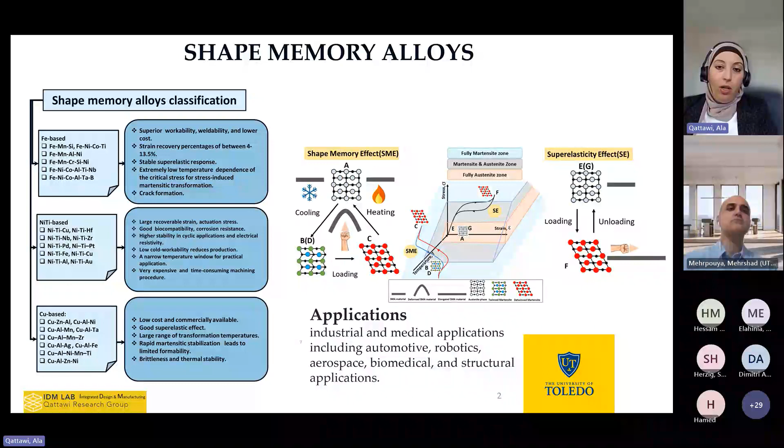So the particular interest in our research is iron, manganese, aluminum, nickel alloy within the iron shape memory systems. Historically, using traditional manufacturing processes, the iron shape memory has good strain recovery, with a varying strain recovery percentage that can be up to 13.5%. We also have lower cost and good workability because of the presence of iron in the alloy system. And with all the research done in traditional manufacturing of this alloy, we also know it showed more ductility and small temperature dependency of the critical stress.

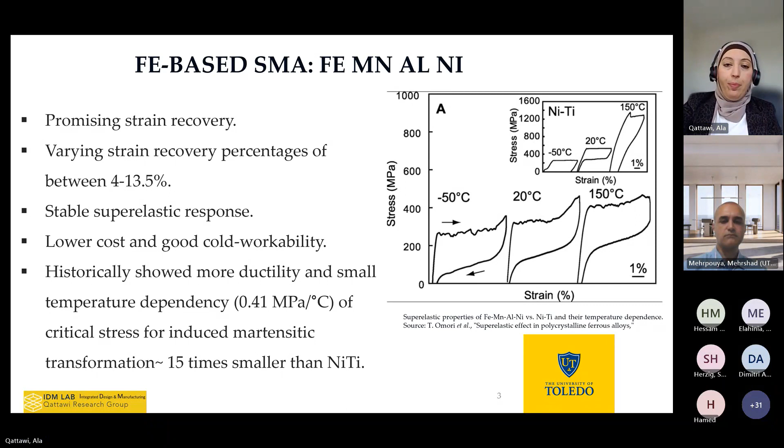Another study has been done on the iron manganese nickel aluminum alloy system for high temperature applications where there's a high variation of temperatures, like aerospace or space exploration. There is a window where this alloy system can potentially perform with a transformation temperature strain that's actually very good and desirable. So there is definitely a window and a potential for exploring these alloy systems.

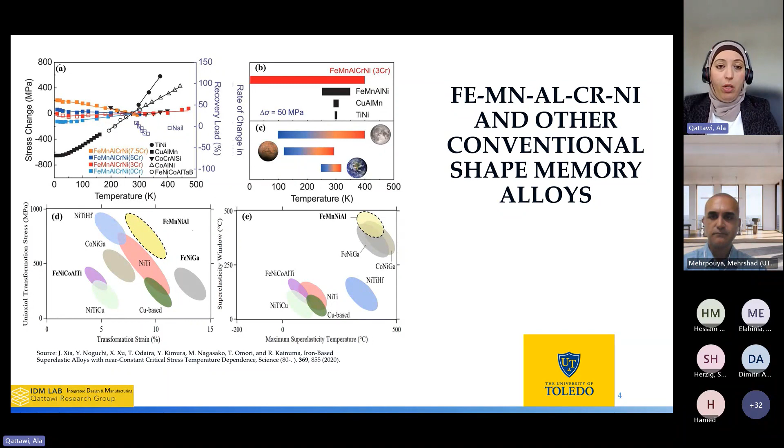Now, one question that can be posed is: if we've already established a process for nickel titanium through casting and induction vacuum melting, why not just explore the same processes for the iron shape memory alloy? What we know from the characteristics of this alloy system is that it's very susceptible to changes in processing parameters, even in traditional manufacturing or potentially in additive manufacturing. The cooling rate, for example, and the thermal changes across the process when we manufacture this part, can change the grain structure.

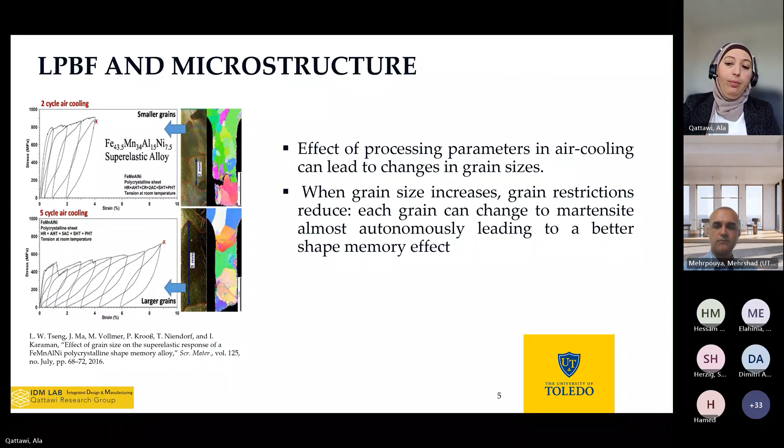This can significantly affect the performance and the super elasticity we can get from this alloy system. So potentially, this alloy system has the potential to show better strain recovery and less dependency of critical stress on temperature. If we understand the process parameters carefully, we can design this alloy system and structure to get the needed properties. And this way of thinking is not new to the additive manufacturing field.

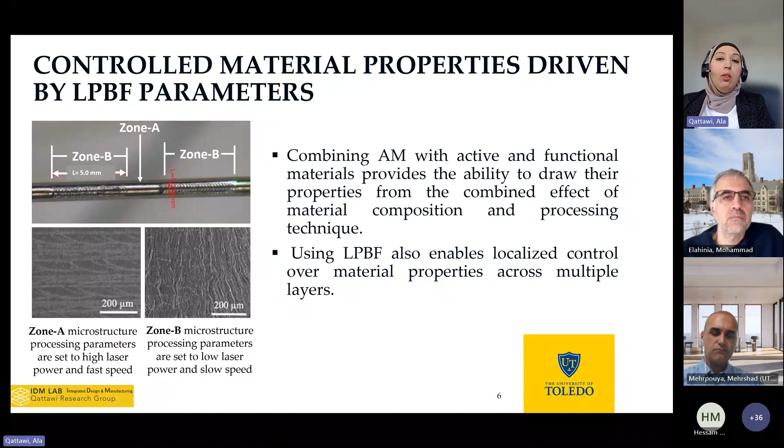Additive manufacturing started with understanding how to manufacture a part, what the material properties would be, and the correlation between structure, material, and eventually the component. Now we're in a phase where we've mastered the initial processing parameters, and we want to do functionally graded materials. This can involve different metals or alloying systems, or even variation within the structure itself. If we can localize the mechanical properties via microstructure in any alloy system according to where the material will function, we can technically control the whole design of the material, from the microstructure up to the component.

So this idea is not new to additive manufacturing, but it becomes critically important when we talk about shape memory alloys and structures that need to change, fold, unfold, or behave in a certain way under service conditions. That gives us a fourth dimension, technically, that we can apply in addition to the third dimension, which is structure, in order to design the full component from the micro scale up to the component scale.

For example, if we change the processing parameters on a laser powder bed fusion machine, that will yield a totally different microstructure within the same powder composition, same component composition—everything the same, with only the processing parameters changed. Basically, this is how much energy we're pulsing on the powder in order to melt it and create the part. So eventually we'll get different mechanical properties if we control these process parameters.

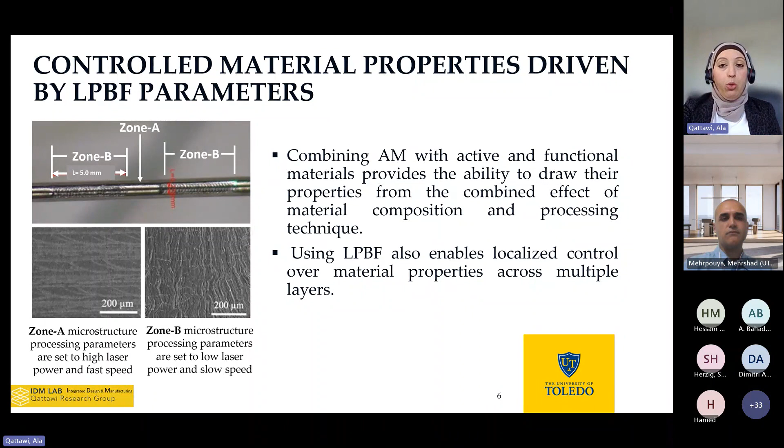So our analysis started with a customized powder. If you're in the additive manufacturing world, you know that powder is the most critical component of getting into additive manufacturing. Other than the well-known alloying systems, there's not much production of customized powder, and it's a process in itself to control the powder shape, particle shape, composition, and so on. So the first step was to customize this powder and have a collaborator who could actually produce it with the required composition and variations of that composition.

I want to add that this composition we used isn't something we just came up with. It's historically and scientifically proven to have a shape memory effect or super elasticity based on traditional manufacturing processes. So we started with what we know about this alloying system, which has been proven to have a shape memory effect.

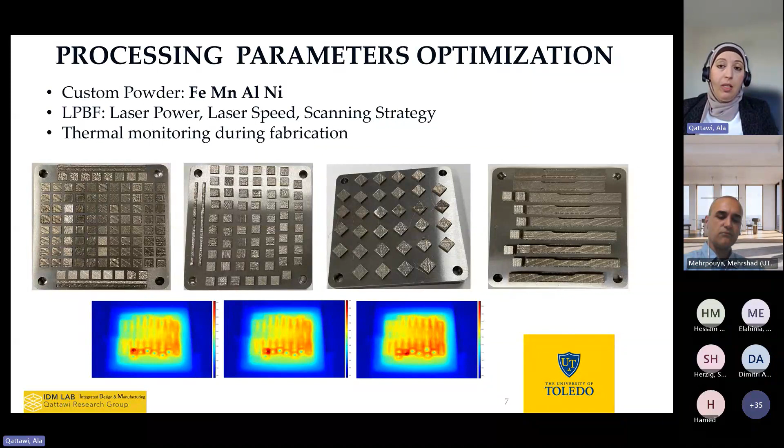The other thing for thermal history effect is with all this collective data we have on the machine, or generally in laser powder bed fusion, scientists are trying to understand two things. The first is if we can predict what the defects will be in any material while we're printing, so the machine can stop, correct its path based on the images it's collecting, and improve the quality of the material we produce.

The second aspect is to understand if we're able to predict the mechanical properties out of the thermal imaging. So if we collect a certain amount of gigabytes from the machine while printing, and we already know the mechanical properties of the tested coupons, can we correlate that? In other words, we also control the thermal properties by controlling the quality, and then by understanding the prediction of the mechanical properties we're going to produce.

So eventually there's no need for testing with machine learning if we can. The collective of this data will be correlated to the mechanical properties we get, and then eventually the shape memory properties in the material.

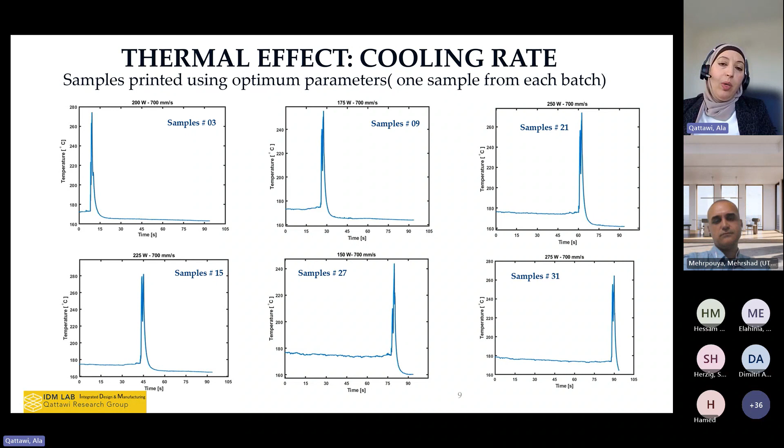And that will give us exactly where the defect happened, in which layer, at what time, in what place in the sample.

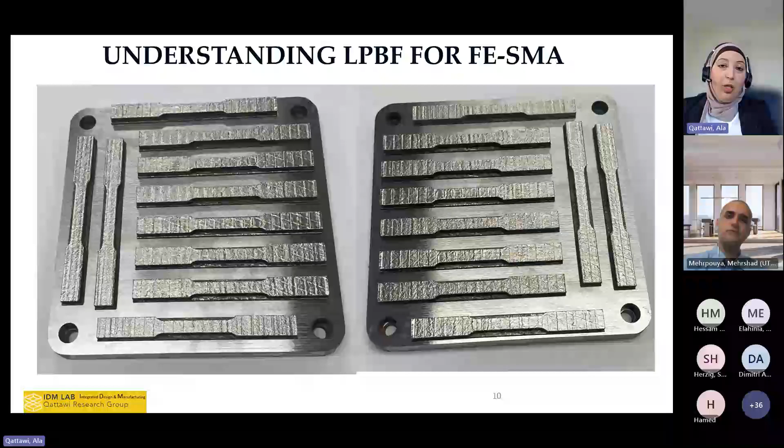Eventually, after aggregating all this data, we reached an understanding of the laser powder bed fusion process for iron shape memory alloy. You can see the differences in the quality of the print, like the consistency and the shiny surfaces you can get — all that is an indication of a good print. Of course, it doesn't conclude how much porosity or micro defects are in the samples, but yet it's a starting point for any additive manufacturing exploration of materials.

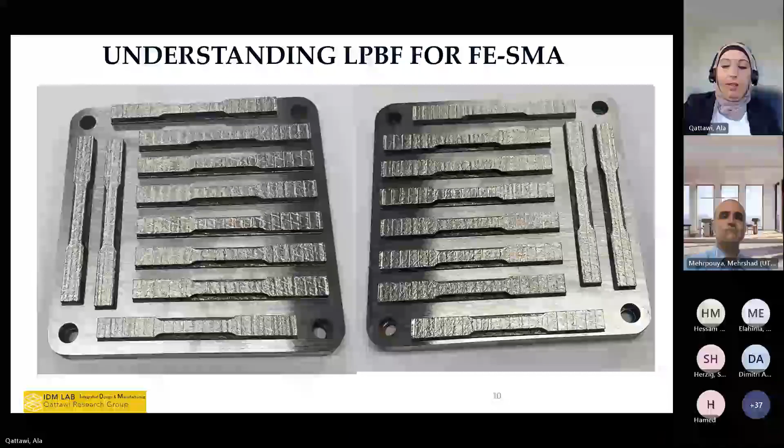If you're in the additive manufacturing world, you'll understand that though it's a very viable process to produce materials, we're limited in the window where we can get good mechanical properties. So even in the high energy density regime, which processes fast to increase production rate, we still see a lot of defects. This was one of the optimizations: we need to be in a good window for the iron shape memory alloy while reducing these defects on the micro scale.

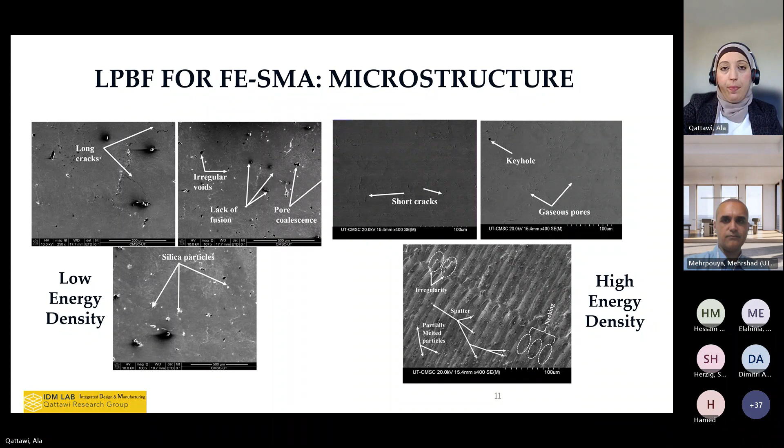So in this recipe we're producing, we also looked at the scanning track morphology, which is how the scanning procedure basically melds and fuses the powder together. With different scanning strategies and different scanning speeds and power, you can see there are also defects and discontinuities that can be produced.

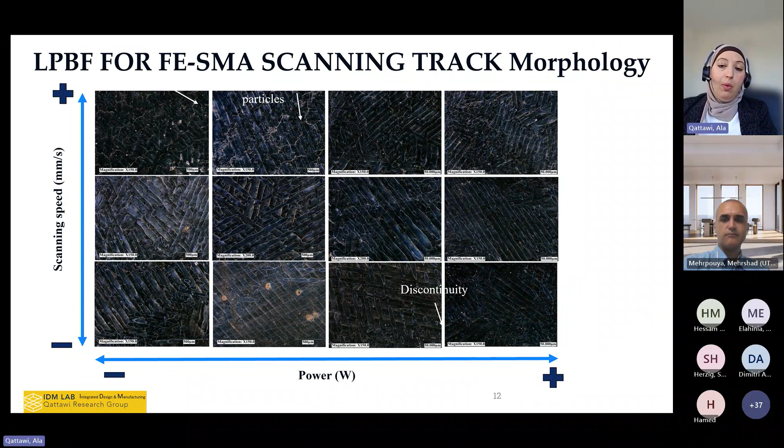With all this information we get from the iron shape memory alloy, it may be correct only for this certain alloy system or its variations. However, in laser powder bed fusion, we cannot predict that for all alloying systems, so it needs to be done every time we explore a new powder composition. For example, aluminum alloys behave certain ways within laser powder bed fusion, and so does the iron shape memory alloy. Every powder composition has its own unique behavior and reaction to the processing parameters.

The next step in the analysis was: okay, we produced a good part. It has shiny surfaces, the surface roughness is acceptable, hardness is acceptable, density is acceptable. Now it's time to look at the mechanical properties of those components.

The initial study showed that we actually achieved good values for strain recovery within this alloying system. Now, when we talk about good recovery, that's not the optimized one. Hopefully, once we completely understand the effective processing parameters and spot this small, tiny window where we have no problems, no defects, good track morphology, good microstructure, etc., that's the area we need to optimize. But initially, the alloy system showed promising strain recovery around 50% between loading and unloading.

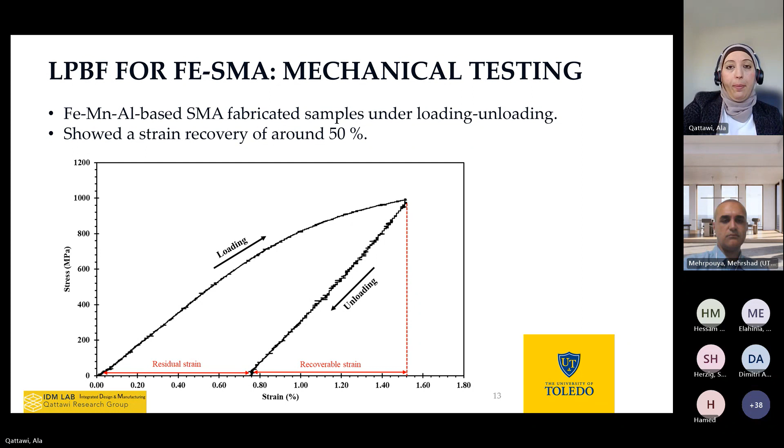As a regular alloying system that will have high loading, we looked at the modulus of elasticity. In this technique, we also applied a manufacturing technique called remelting. Remelting is basically processing the material the same way, but instead of the laser passing one time, we tried to do it a second time.

The remelting doesn't necessarily use the same energy, laser power, and speed as the initial scan, but it serves two purposes. The first is reducing any microstructure defects that happened when the laser, the first time, couldn't fully sinter the powder. The second objective is to somehow treat this material with the laser in order to get the bulk material we need.

This technique reduces the speed of production, but it still improved the modulus of elasticity for this specific alloy system. Now, one problem we found in this alloy system is the unpredictable brittleness of the material. At certain laser powers, you can achieve with the as-built, single laser pass, low elasticity but high hardness, and the material is brittle—so brittle we couldn't even get it out of the building plate in one piece.

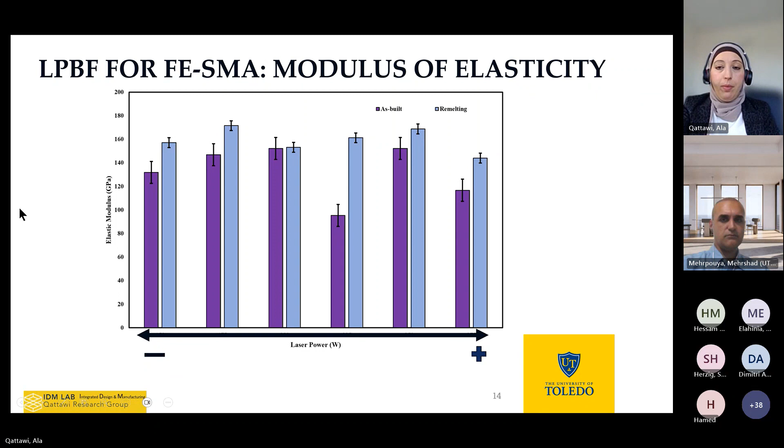Because of inconsistency and the heterogeneous material we produce in additive manufacturing, the dog bone style testing is not always very accurate. It can give you good information about the material, but what we need is exactly the localized control. So if we localize certain areas within the sample, will that affect the mechanical properties eventually?

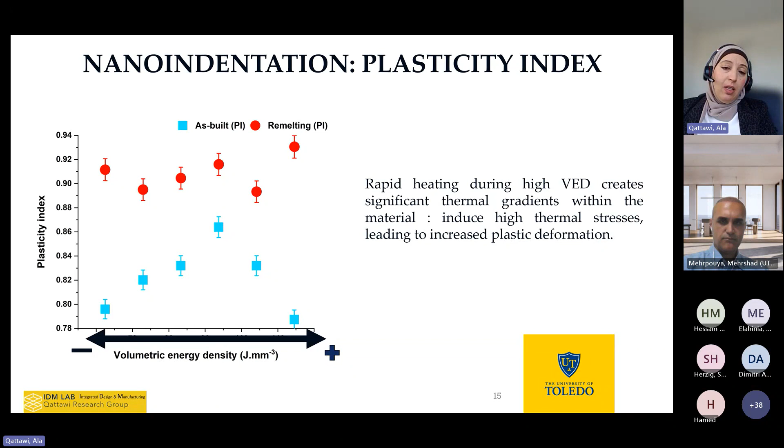I apologize, I don't know what happened to this figure, but the other step here is to look at the specific shape memory alloy specification, like the transformation temperature.

Since this is an iron shape memory alloy, you can see that the regular DSC didn't detect great variation in the transformation temperature. The reason for that is because this system is iron-based, and usually when we have iron, we have to do a magnetization test because the increase in temperature will increase the magnetization effect on the material and eventually affect the DSC values.

You can see that we get good magnetization results for this alloy system specifically. It's not great, but it's an acceptable one compared to the traditionally manufactured one. That gives us an idea of what's happening, why we're not achieving the same transformation temperature profile if we're doing the same composition.

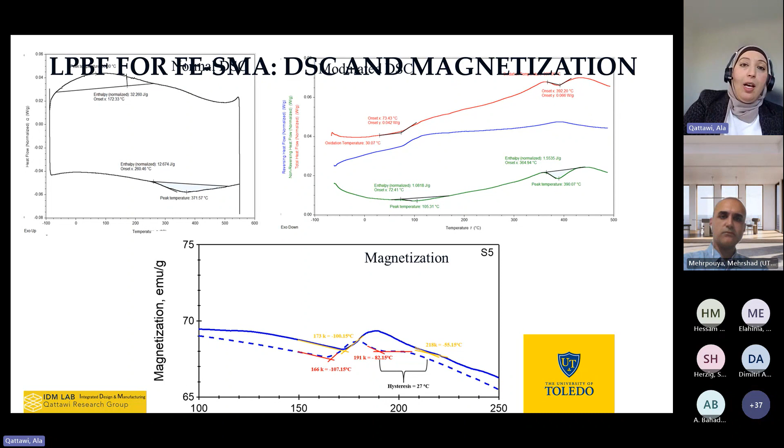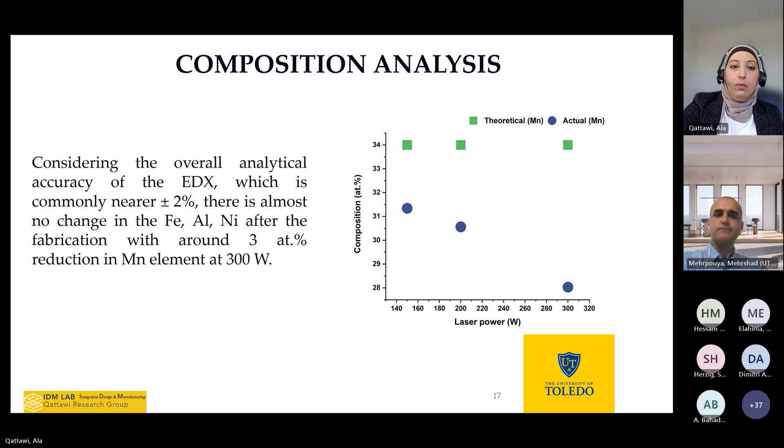The next step is to leave you with this idea: when we control the material, control the material properties, localize it, and control it very carefully with the laser powder bed machine or any additive manufacturing machine, the next step is to explore how this will be integrated into a structure. Eventually this component or material will make a final part that has a certain function. So the next step of exploration for iron shape memory alloy, or any shape memory alloy, is how to put that with a controlled structure.

So understanding the 4D of the design: what will be the design of the material when it folds, unfolds, bends, unbends, or twists, performing any of the intended functions, and how we can control that during the process. Instead of training the material and doing all these steps for the shape memory to remember its original shape, can we do that during the process itself, starting this during the laser powder bed fusion process, and eventually set the part for success with easier and less time?

Another step here is that additive manufacturing enables creating structures that we weren't able to produce before, like sandwich structures. What happens if we merge this alloy system with other known materials through laser powder bed fusion to get a unique structure that behaves in a certain needed way? For example, a skin-core sandwich structure where the middle behaves a certain way and the outer skin behaves a certain way for surface conditions, specifically oxidation resistance, while still having shape memory superelasticity or shape memory effect. These layers can be controlled, between one layer of about 20 micrometers or larger, because of the laser powder capability. So control of thickness is not an issue in laser powder bed fusion, opening doors to leverage different structures we weren't able to produce before, not just because of complexity but because of the microstructure scale we can now achieve.

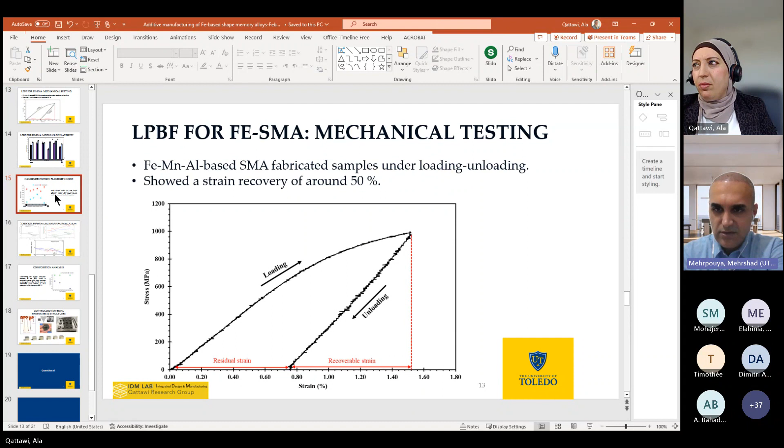All right, thank you. Sorry, Dr. Elahinia, I took your role for a couple of minutes. Please go ahead. Oh, thank you. No, I had some technical difficulty, my apologies. Please keep going. No problem.

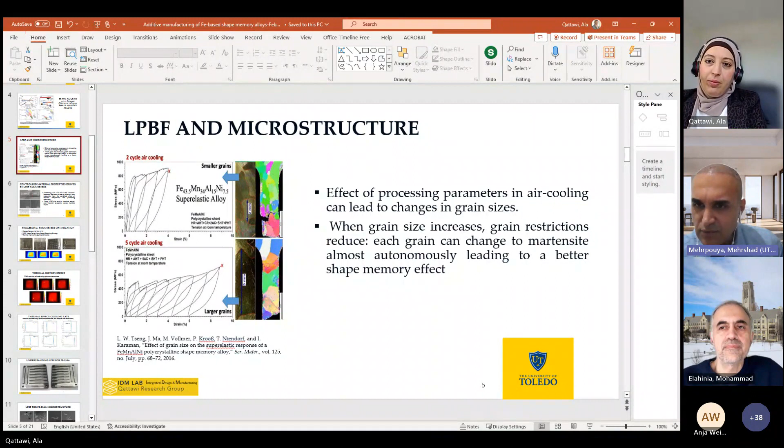I think we have one more question here. In slide 14 or 15: why does the stress decrease in some part of the as-built sample and then increase after remelting?

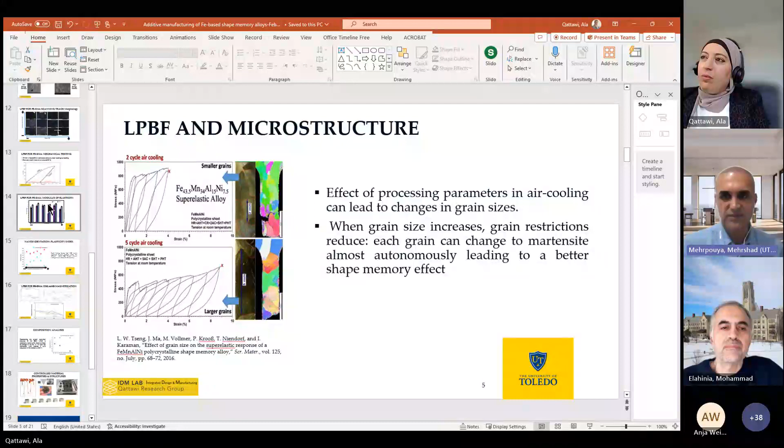This is a good question. When we look at the as-built one, the dark purple one, it's not like a straight line. Sometimes you have an increase in laser power, and significantly after that the material behaves actually better. So in laser powder bed fusion, it's not like a line; whenever you increase the laser power, the material properties increase or decrease. Usually what we find is that the thermal dynamics of the melting pool affects what happens afterward for the mechanical properties.

So the remelting is a slower pace with a slower power laser that passes through the layer and basically improves the mechanical properties. Now, why this happens with each different laser power and laser speed is because of the differences in the thermal signature on the melting pool.

So that needs more understanding on the thermal pool itself, melting pool analysis. We know, for example, in the lower ones, we may have certain phenomena happening, a lot of particles that exit outside of the melting pool or they don't fuse well. That's certain information we need from the melting pool analysis.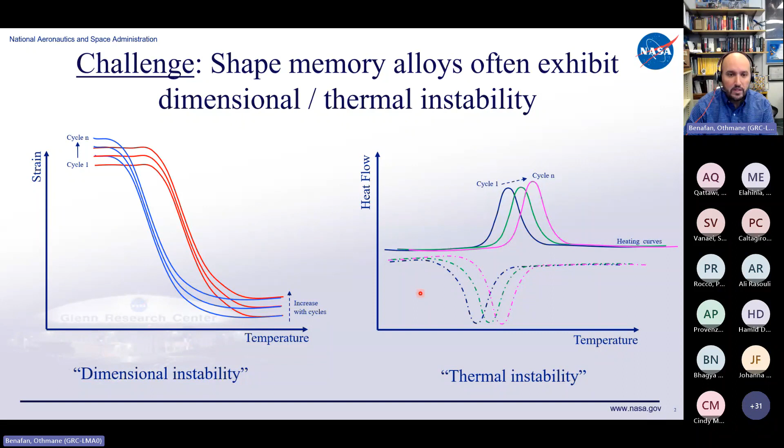So how do you strengthen shape memory alloys against these two things? This has implications to fatigue, durability, and all sorts of things. So let's take a look at some solutions here.

I bin them into intrinsic and extrinsic. For example, the first solution is through the alloy itself. When we alloy, the first thing you start with is the alloy composition, chemistry. So you add elements to, let's say, nickel titanium. You make an alloy nickel-rich, for instance, so you can do solid solution strengthening, or you add other stabilizers like cobalt or what have you, depending on what region you're looking at. That's the first line of defense against those challenges, is your chemistry.

And then once you have that chemistry locked in, you can go to the second tier, which is processing. This processing could be in the way of precipitation strengthening. For instance, if you have a nickel-rich alloy, you can age it to bring up precipitation to strengthen it. Or you can do some other way of promoting stabilization via grain refinements, texture, cold work, or heat treatment, etc. All those are a second tier because you already have a locked-in composition. It's a fairly common way of stabilizing the mechanical and thermal response in shape memory alloys.

The third bullet there is stabilization via thermomechanical conditioning. This could be at the material level, but also could be at the component level, something that we call training. Sometimes you'll hear the word training used out there, or thermomechanical conditioning, or reconfiguration, or stabilization. There's a ton of different ways to point at the same thing. But here it could be using something like ASTM E3097, which is a uniaxial constant force thermocycling. You can use ASTM E3098, which is a uniaxial thermal free recovery. All those techniques can impart some sort of stability from a thermomechanical perspective. So that's the order of it.

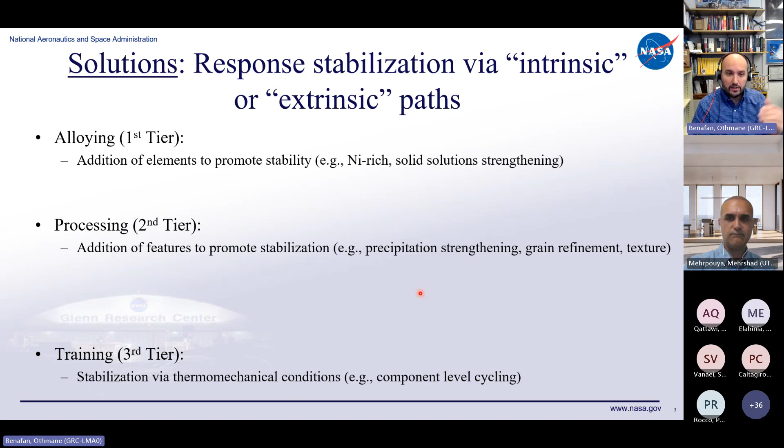But some of these solutions don't always work. And here are some challenges that come with those solutions.

For instance, if you go to tier 1 and do solid solutions, sometimes by adding nickel to the composition to make it more stable, you lower the transformation temperature. So you take a knockdown on transformation temperatures. As we know, the more nickel you add, the lower the transformation gets.

On the processing side, tier 2, you can do features like precipitation strengthening. But if you have a titanium-rich alloy, nickel titanium for example, or nickel-ti-hafnium, on the titanium-rich side you cannot effectively precipitation strengthen. You can precipitate bad phases that hurt the device or alloy, but they're not effective for strengthening. Precipitates also change the matrix composition—when precipitates are nickel-rich, you remove nickel from the matrix, changing its composition, and therefore the transformation temperatures can change.

And third, there are some alloys where precipitation doesn't even apply, like ruthenium niobium alloys or some very high hafnium alloys, where the solution temperatures of precipitates are below the activation temperature. So there's no way to precipitate anything because the activation temperatures of interest are very high—700, 800, 900 degrees C, for instance. And the training applies either way.

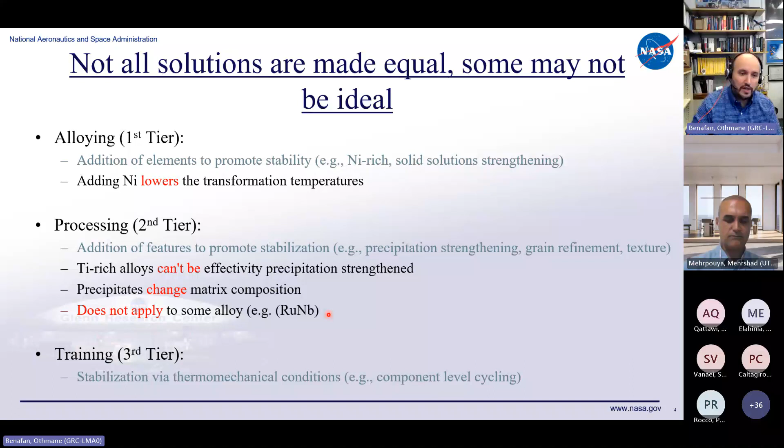So here we introduce the notion of additive manufacturing dispersion strengthening. This cartoon shows that when you have nickel-rich alloys, for the case of nickel titanium for example, you can do precipitation strengthening, and you can also do dispersion strengthening. Okay, and this is what it looks like.

The blue line identifies stability, and as you go into the titanium-rich region, stability is lowered because you don't have a strengthening mechanism. When you go titanium-rich, following the red line, the temperatures increase. Sometimes we're interested in high temperature activations, but we have to compromise and go slightly nickel-rich, lowering it because of stability.

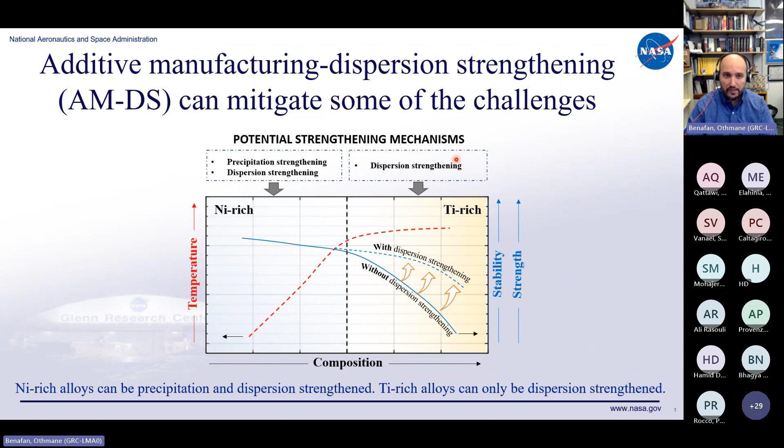Well, what if we can keep the transformation temperatures high and increase the stability via dispersion strengthening? So this is the whole idea—to keep the chemistry intact, like this cartoon shows here, comparing precipitation versus dispersion.

In the case of precipitation strengthening, you start with a base material with no precipitate. You heat treat it with aging heat treatments, and you promote precipitation. So what's the end result? As you precipitate, your transformation temperature shifts, and your enthalpies and other properties change.

Now if you look at dispersion strengthening, you have a base material and then add some dispersoids, making it a sort of composite with dispersoids. In this context, we're talking via additive manufacturing. Then you can maintain your transformation temperatures and enthalpy without heating it too much. The goal is to maintain temperatures and heat flows while also getting strengthening effectively.

This idea of how to produce this additive manufacturing dispersion strengthening came from a couple of colleagues here at NASA GRC. They introduced this concept in nickel-based superalloys called GRX810, listed in a nice paper in Nature. They used this method to strengthen nickel-based alloys and saw tremendous improvements in creep properties, oxidation, and other things. It works tremendously—it's becoming one of the go-to alloys in the industry for these types of applications. This served as an inspiration to us to try this concept in shape memory alloys.

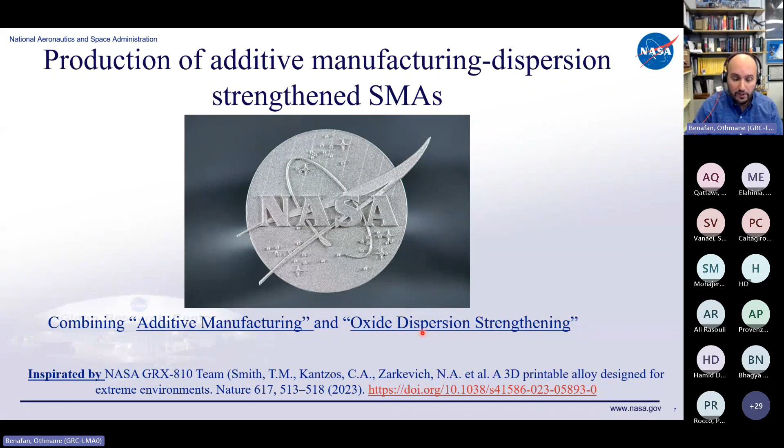So let's recap with that inspiration in mind—this is what we are doing. We take an SMA powder, just like this cartoon shows. It could be NiTi, or what Professor Qattawi showed could be iron also. And we mix it with some dispersoid. This dispersoid could be yttria, hafnia, boron nitride, or some other formulation you'd like to mix in, in the nanometer region.

This is not in the micro scale or the micron level, but it's in the nano level. Then we take this powder plus the dispersoid powder and we mix it. We mix it using acoustic mixing, or we could use some sort of ball milling also. And the idea is to coat the SMA.

In this cartoon, you can see one SMA particle of powder sphere, and then you can coat it with this little dispersoid powders, yttria for instance.

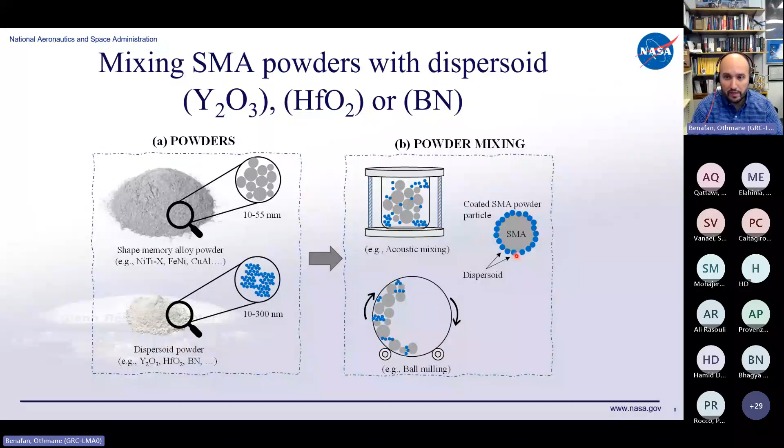How does it work when you do this process from a powder level before we even go to the additive manufacturing side of things? It looks like this. So from the left here, this is the regular powder, just SMAs. There's nothing applied to it just yet.

Then we add some weight percent of yttria as shown in the middle here. This is the powder. The idea here is that the powder is still spherical, but here it has these things adhered to it. And if I zoom in, you can see some of the aspect of yttria coating the SMA powder. In this case, it's nickel titanium alloy.

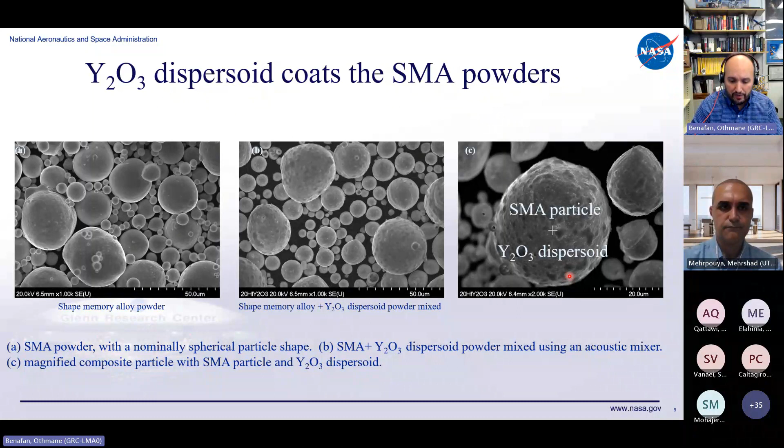The same concept is used for hafnia or other things. But you can see here, number one, can you coat the powder? Can the dispersoid adhere to the SMA powder before you start any additive manufacturing, as a check? And from this data, it looks like we are achieving that process, as was achieved in other alloys, like I showed you on the nickel-based superalloys.

If we dive just a little more in there with a couple more SEM images, this is particles doped with yttria. In this particular angle, you can see how the yttria is decorating the SMA particle. The SMA particle is in the middle, and you can see yttria is decorating, going around it here, and we're missing the image on this part.

The idea is by applying that particular mixing procedure, which has its own science - what time to use, and temperatures, frequencies, and a whole thing that the group here at NASA GRC have defined for the structural alloys - we're using that applied to functional alloys here to be able to coat the powder in this fashion. So not just the precursor, we have the powder and we have it pre-coated with dispersoids, and then we go to the additive manufacturing.

I don't have to introduce additive manufacturing to this group, but in this particular one, we use the laser powder bed fusion, and you're familiar how that goes. So we just apply the powder that is pre-coated in this case, and we apply our laser parameters: feed rate, hatch spacing, scanning speed, etc., environments, and all those good stuff that we all use in the laser powder bed fusion. But it's not limited to that - you can use E-beam or other types of additive manufacturing as well.

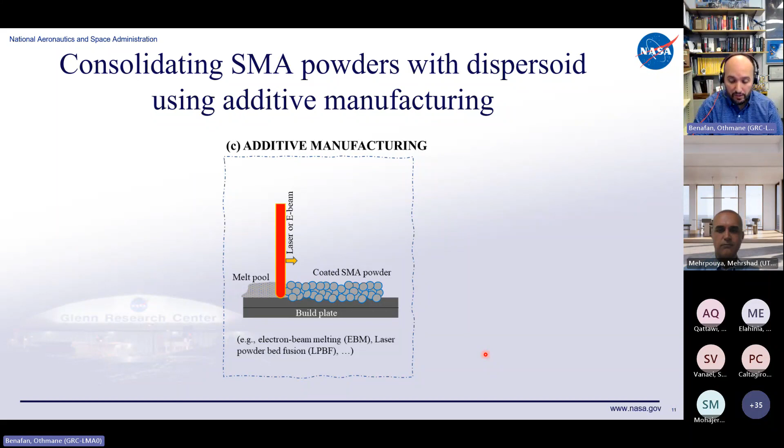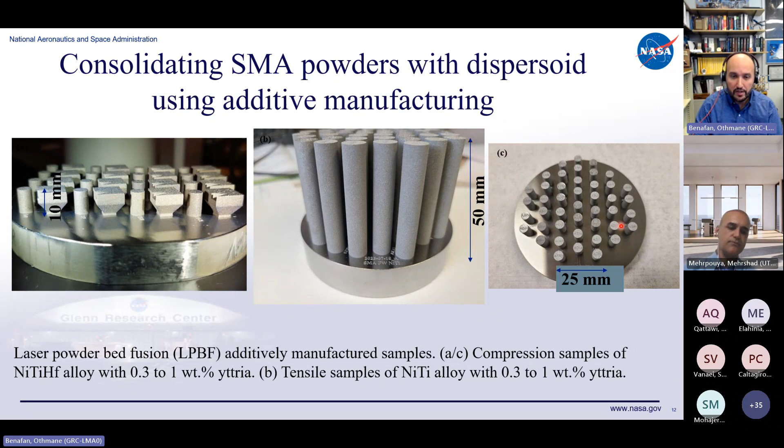So that's check number one: transformation temperatures are achieved and we're not affecting them that much. They are within target.

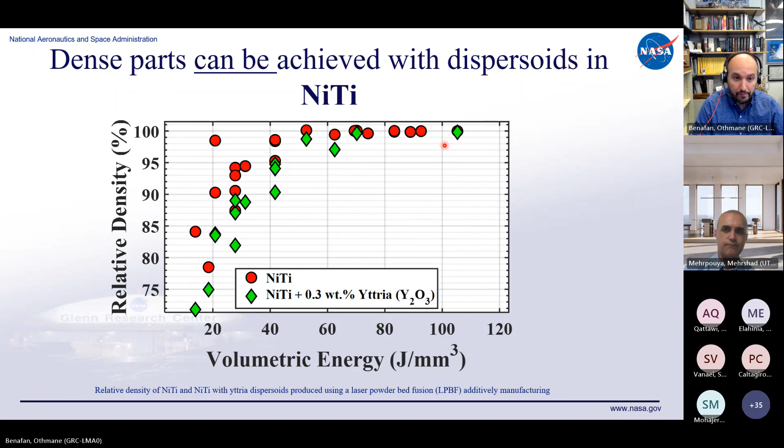The other important piece of information here is, can we get dense parts by coating these powders? You're thinking density issues and so on. And as with most additive manufacturing, depending on the volumetric energies, you can achieve good or bad densities. You can see here, the ones on top, we're achieving pretty good density compared to the binary nickel titanium wrought alloy, dense part, not even additively manufactured. That's our reference frame here. The goal here as result number 2 is we're able to achieve a nearly full dense part with yttria in the materials for strengthening purposes. So that's a dense part, and we wanted to look at mechanical data.

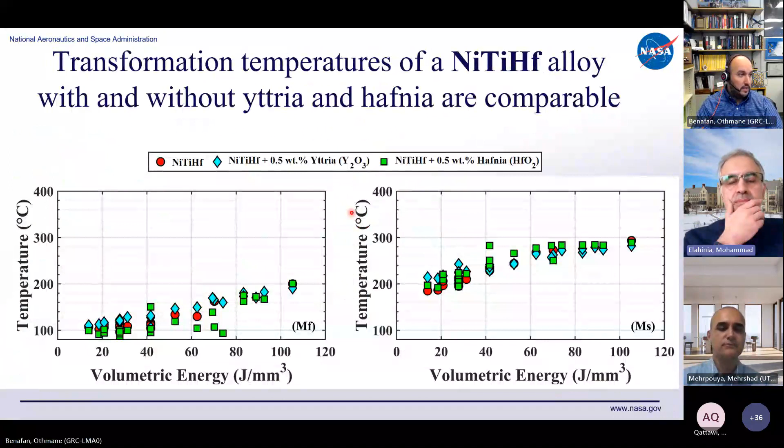Anwar asks: is there any way to confirm, as shown in slide 10, that the coating you apply for SMA is consistent throughout all of the alloy elements in the SMA? Yeah, so it's not segregated. Let me see if I can find slide 10. Yeah, so there isn't necessarily a segregation if you use the right mixing protocol. The majority of the particles are coated in a similar way, and we have bigger maps of this one blown up throughout, and you can see that most powder is coated the same way. So we can achieve uniform coating.

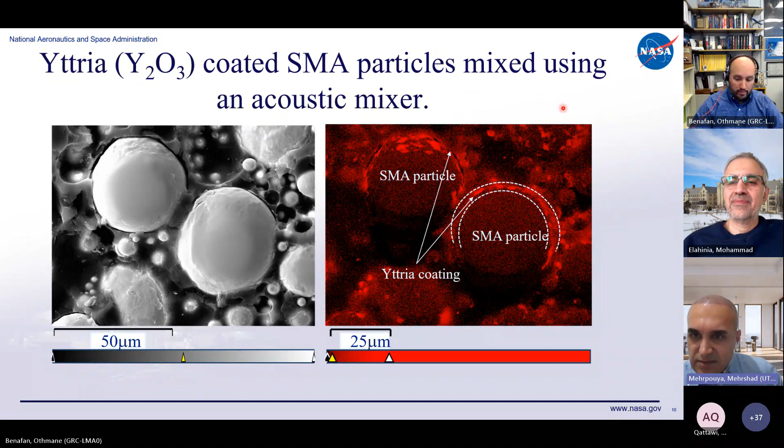Oh, we have one, it's quite long, from Angelo. Thank you for the excellent presentation. From slide number 6, the result obtained from dispersion strengthening seems promising for the future. When do you feel that dispersion strengthening technique for NiTi will reach its most optimum ability? And do you feel that can be applied also for iron-based shape memory material in future?

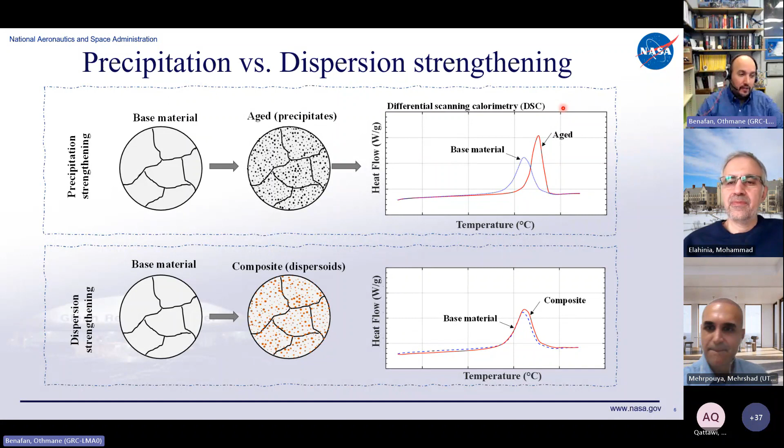Yeah, so for your first question about reaching maturity, I think it is reaching maturity right now in the structural alloys, and we are behind that in terms of the next step. But there are other issues in the shape memory alloy additive manufacturing industry, we still have things to fix in terms of additive manufacturing itself. So those things are coming together nicely, and groups like the Toledo group and others in the world are looking into how to make additive manufacturing better. I will wait for that part to come, and then we can add the ODS dispersion strengthening, and marry the two to mature the technology.

Your second question, I don't see why not. It could apply to iron-based SMAs. Mechanisms are different, grain structures are different, so there are some things that need to be refined in terms of the alloy itself. But this dispersion strengthening could be applied as long as the adherence happens, as far as the particles are coated properly being an iron alloy.

Okay, very good, there is one more question. Someone asked, have you considered using other coating methods such as ALD or PVD?

No, the short answer is no. And the reason is this method, a lot was invested in it and it works great. We have PVD and CVD here at NASA Glenn. We've been talking about trying it that way, but that process changes things on the substrate and could mean some other things. So the short answer is no, we haven't tried it yet.